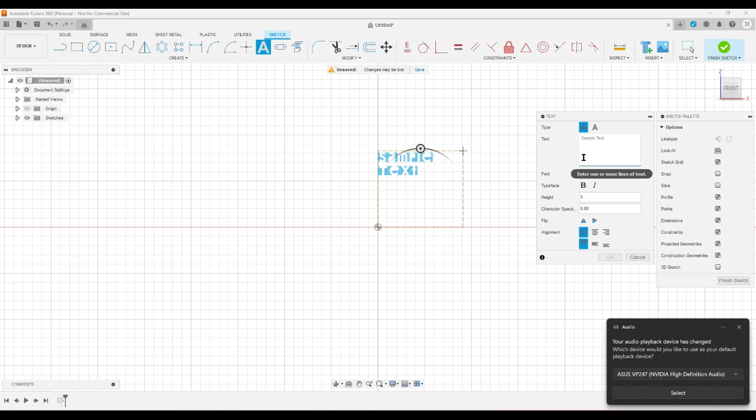So if I put like calories, enter, like quarters, and then like potato salad. Oh, it's doing it, but it's not. Right? And then if I go ahead and extrude it all out real quick,

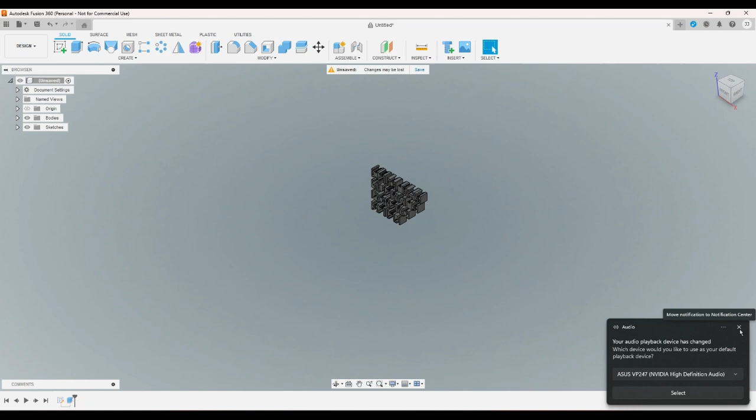I can make a sketch here and see how far apart these letters are. And that actually looks pretty good from here.

So if I project this, and I just measure this distance between this point and this point, it's 2.183, which is pretty good.

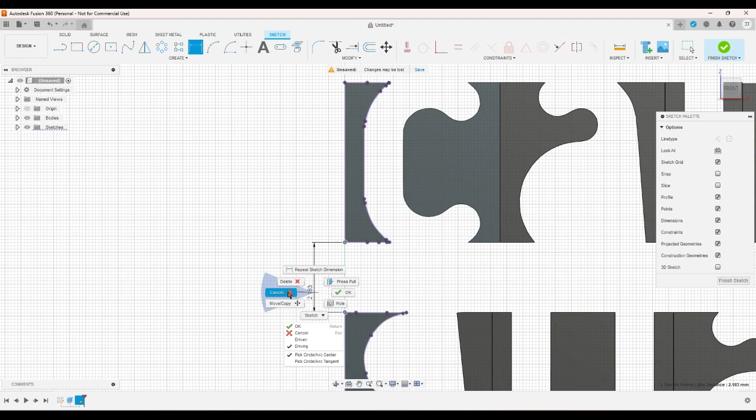I think I might change that, so it's element font info metrics. It's under this OS/2 tab, by the way, on the left side. I might change that to like 800 and like 75.

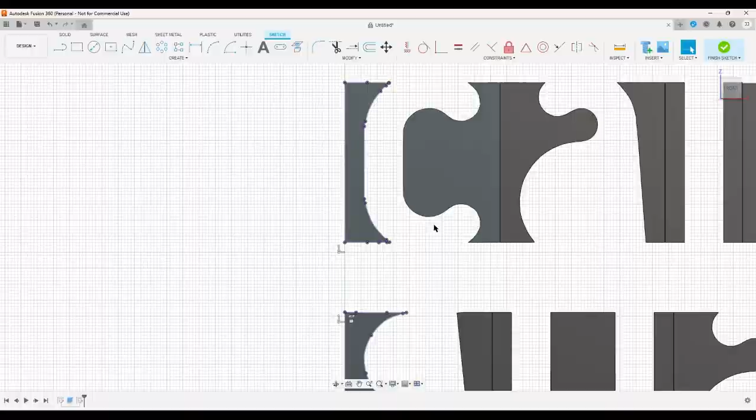And apparently all of these ascent values should be the same. So now if I close Fusion and then I redo this, yes, and then I open Fusion again,

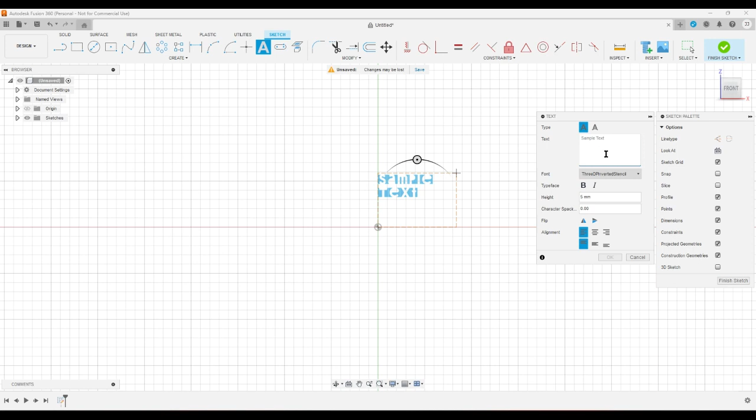And I start a sketch, and I just do a quick little text box. Not 54. I don't want to do that. Okay, that looks like it's okay.

And then if I extrude it like 5, now I can measure. I'm gonna measure all of these actually, because I don't know if you noticed, but when I do the space, it changes the distance between the lines, but only slightly.

Okay, so that's 2.22. And this last one is 2.104. 2.224. 2.104. I think that's close enough to 2 millimeters for my purposes.

And if I need extra precision, or if I need to be more precise than that, right? Then I could just put like these lines here, right? I say I want them 1.2 apart. That's wrong. 1.25, 1.25.

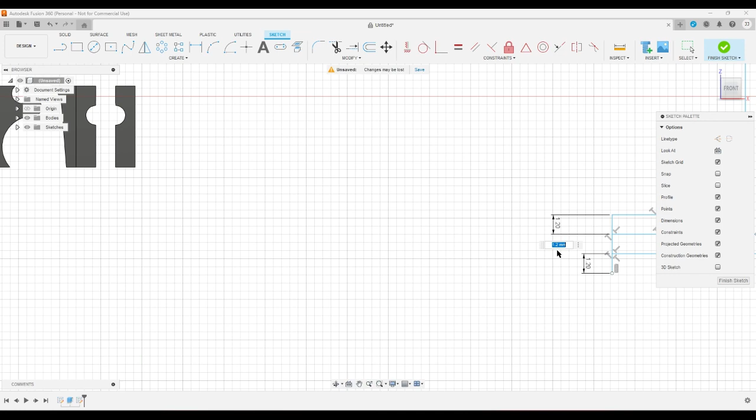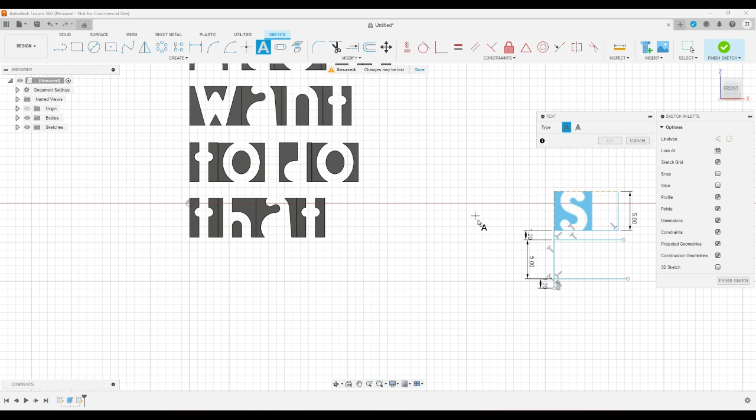Right, and then I could put a text box here. And then I could put a text box here. And I could put a text box here. And now these are all separated by the correct amount, right? Or at least they should be.

So if I were to make a, because they're supposed to be 5 millimeters, if I, yeah, 1.2 and 1.2. So yeah. Okay, now I'm done. Now I'm done.

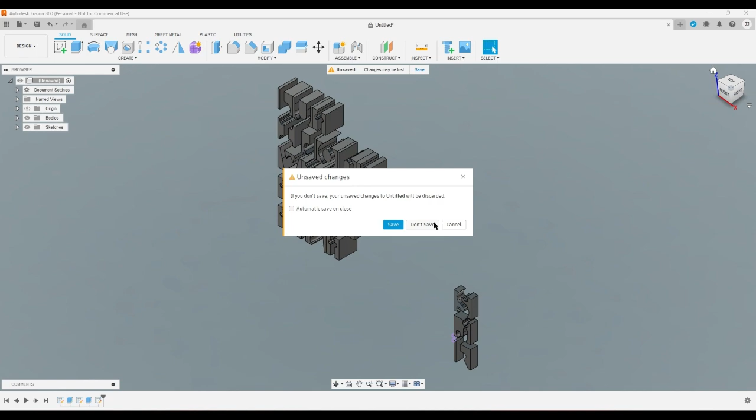So, yeah. I mean, unless I could figure out how to change the size of the space. That's actually what I was looking up. But I can't find anything. Instead, it told me how to change the line spacing. Also, I don't know what the really used typometrics is. I thought it might have something to do with the fact that there being a space in, I don't know.

Oh, you know what I just realized? I think I know why the space bar does that. I think I know why having a space does that. It's because this window is probably set to be the whole 1000, and it needs to be something like, what was it, 766? Let's see.

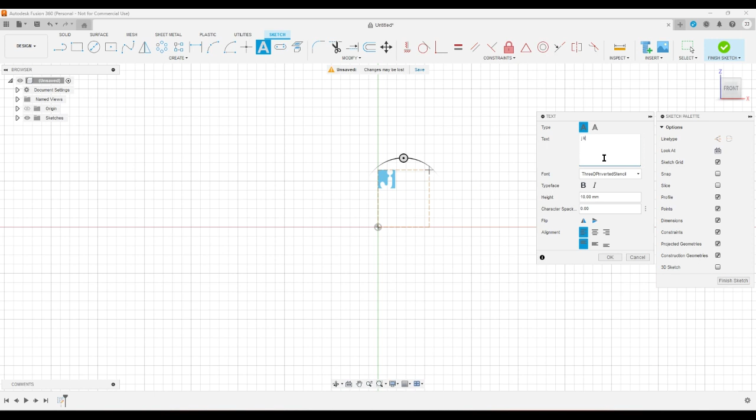So, put a text box, select my font, okay, so that did change it, okay, but now I need it to be smaller than that, so...

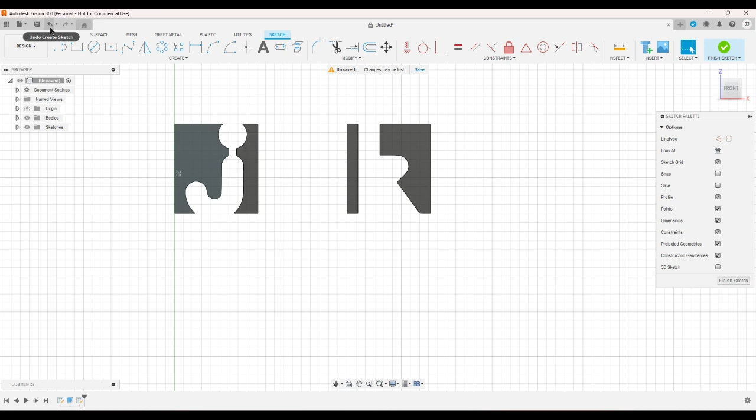If it was set to, what was it set to? 750? Okay. Real quick, how much does that give me? Hang on. It should have been 5. Okay.

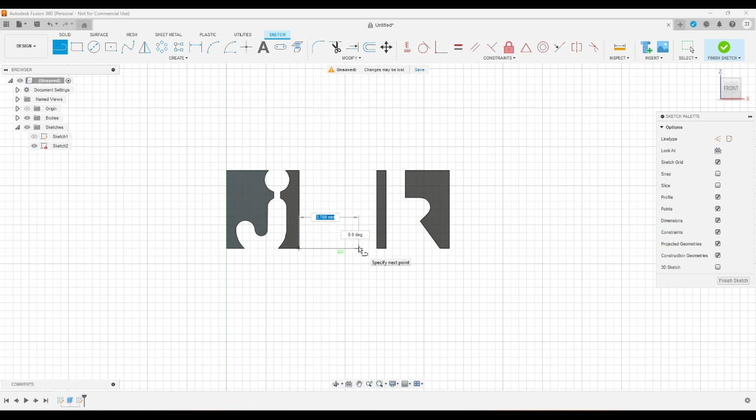4.9. What if I made it like 3? I feel like that would work. So if the 750 was basically 5, right, then the units per millimeter there would be 750 divided by 5, which is 150. And if I want 3, then I want about 450. So...

Okay. Okay, so now I go into the settings and put this in there. I said I put it in there. Yes, replace it. Open up Fusion again. Okay.

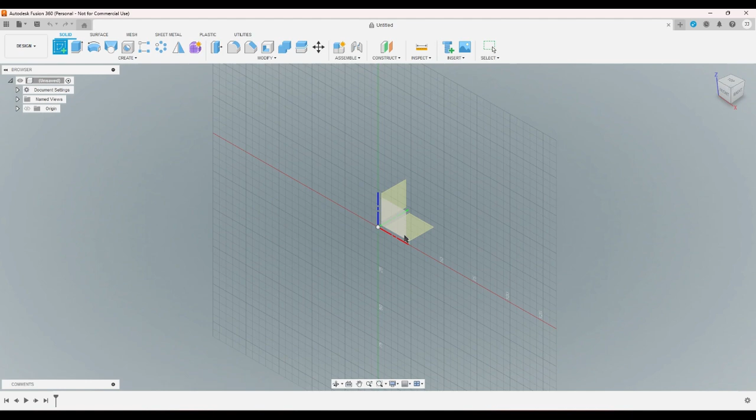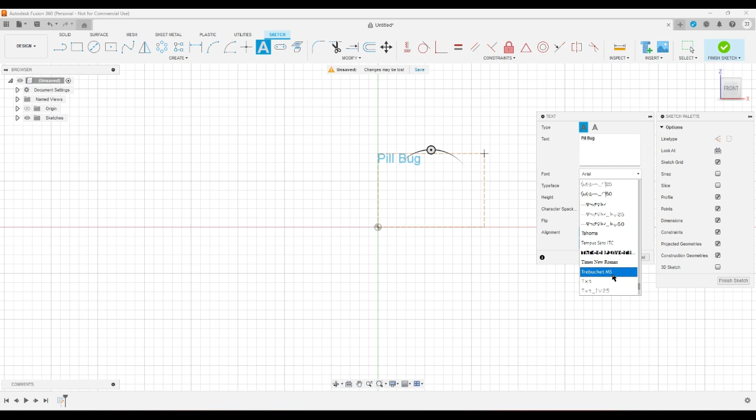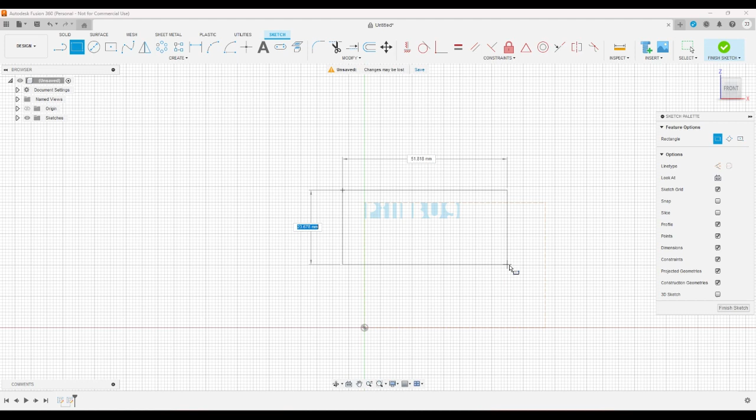5. I'm gonna write Pill Bug because that has an L at the end. And an L needs to be differentiated properly from a space, and a space and an L are the same shape, like topologically, but they're a different size. So in fact, I'm gonna go ahead and do this the right way.

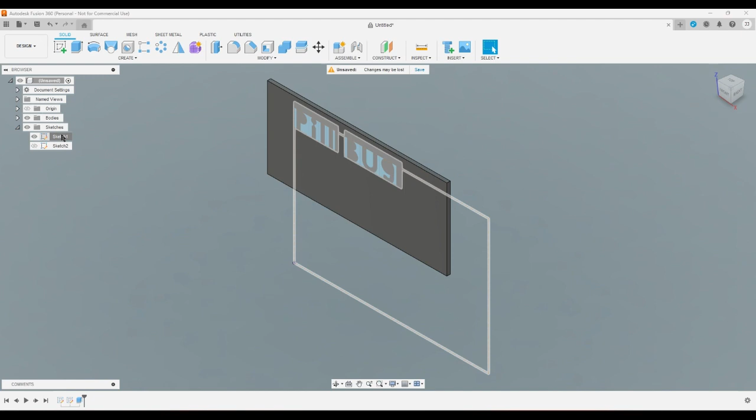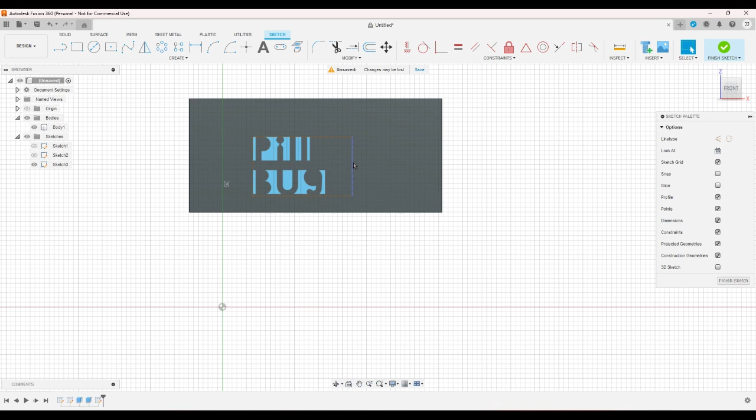That didn't work. Okay, yeah, that looks right. Okay.

I wonder if I can change the kerning for the space. No, because that'll just give it more. Yeah, that works. Okay, so now it's done. And the reason why I couldn't figure out how to change the size of the space is because it's so self-explanatory, no one needed a tutorial for it. I'm just stupid.

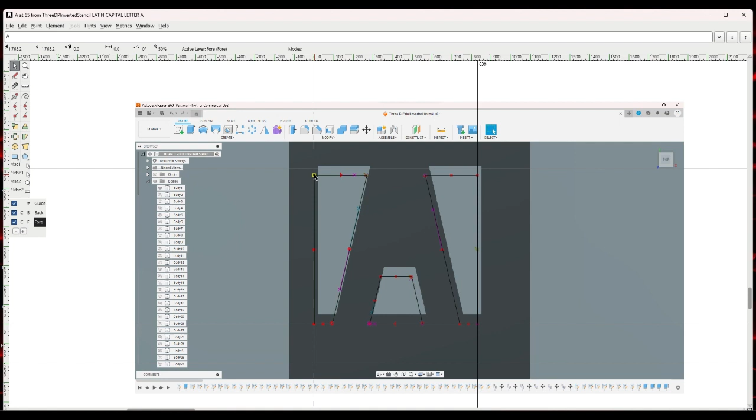I don't know. If I can change the vertical window of an individual character, or have to make them all 700. Let's see. It's 765 and a quarter.

So what does glyph info do? Comment, positionings, pairwise position substitutions, alt subs, ligatures, TeX and math, height. FontForge glyph info, TeX and math. Encoding and Unicode data, glyph comment, simple glyph positioning, counter masks, components, TeX and math.

The TeX pane allows you to specify glyph specifications such as used in TeX TFM files. The height and depth fields are often the same as the glyph's bounding box. If you don't fill these in, that's what FontForge will use by default, but they should be corrected for optical overshoot. So in glyphs like O, these fields should be clipped to the x-height and baseline. The italic correction is used by both. The top accent position is another concept from the math table and provides a horizontal position over which to position math accents. Vertical positioning is done somewhere else.

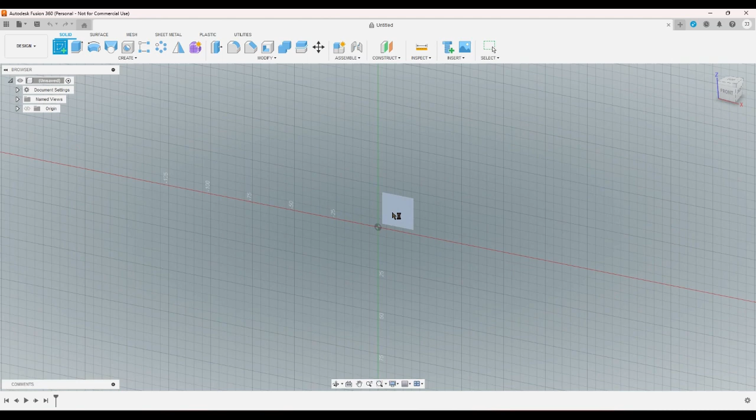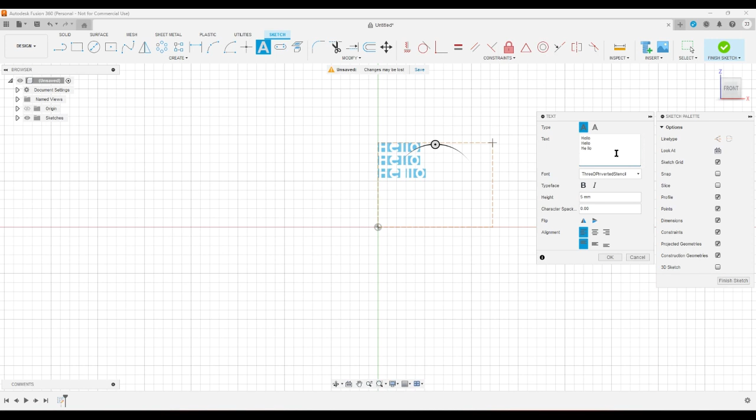Okie dokie, text box. 5. 3DP inverted. Hello. Yeah, okay, that's what did it. So if I do this - 2.026, 2.026, yeah, and the nearest tenth of a millimeter is 2 millimeters, so that's close enough for me.

That's exactly how I want the font to be. So now for sure the font is done, because I even figured out why it was doing that weird thing where if you put a space in it, it made the line bigger - it was because the space was defined as too tall. So now I know how to do it. It also explains why it's still bigger but smaller when I made the line spacing what I wanted, because I made the line spacing closer to the height of the space bar.

So yeah, this font for sure is done now because it has all the characteristics I need. I mean, there are some pieces of punctuation that maybe I should do, but I can't see myself needing those anytime soon, so I'll just do them when I need to.